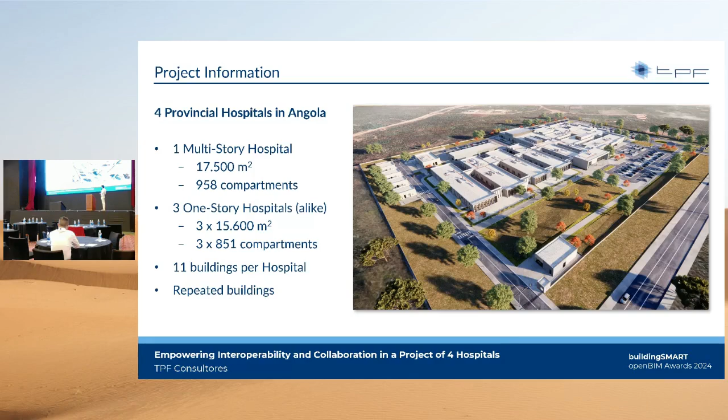In these 4 hospitals, each one of them has 1 main building and then 10 satellite buildings, and some of those satellite buildings are repeated between themselves. So just giving you some project metrics, around 17,400 deliverables were delivered, which are hosted in 376 different folders on the CDE. We have 81 native models.

In terms of IFCs that needed to be exported and shared, we have 66 different types of IFCs, and the IFCs that needed to be shared and delivered to the client, to the appointing party, were optimized to be reduced down to 35 different types of IFCs.

So our design development started from IFCs that were provided by the appointing party. These IFCs had not only the design concept, the geometry and so on, but all the design requirements that needed to be met for the specifications that the appointing party wanted. From these IFCs, all the task teams could start to work simultaneously without that initial interdependence between themselves, especially from architecture, and they worked collaboratively directly on the CDE.

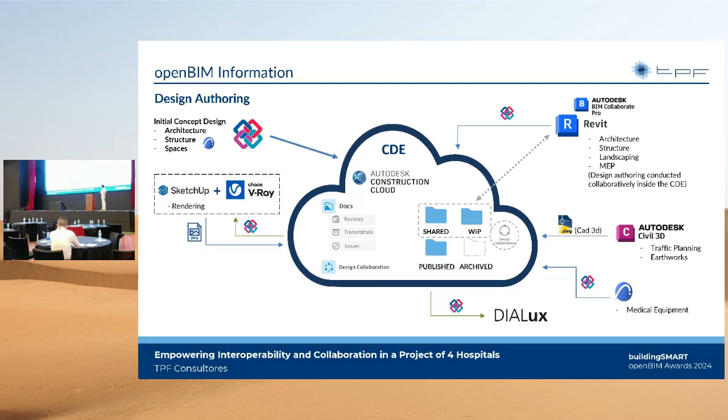And once the native models started to reach a certain level of maturity, IFCs were shared periodically to be used for many different purposes in this information exchange between the software. And just a quick note, we also produced documents on the Microsoft SharePoint Cloud and then shared them on the CDE. So this software ecosystem is focused on open standards usage. Of course, the ecosystem then branches to other aspects.

So continuing here, for the use of IFC from the side of the appointing party, Solibri was used, not only to check the models, the design progress, the technical solutions that were being implemented in the design, but especially and very importantly to conduct plausibility takeoffs for cost control. So having up-to-date IFCs was really important on their side too.

From the side of the appointed party, from our side, BIMcollab Zoom was used globally, which was widely embraced by all the team members, as it was very easy to use and accessible to everyone, and this really empowered the engagement of all the team members independently of their BIM proficiency. We also used this tool to conduct the clash detections and to perform the IFC quality control.

And in some specific cases, we used Navisworks to simulate options to accommodate all the MEP systems inside the available spaces. So this was for technical coordination rounds to see what the options were, so we could put all the MEP systems inside some spaces that were sometimes not so big.

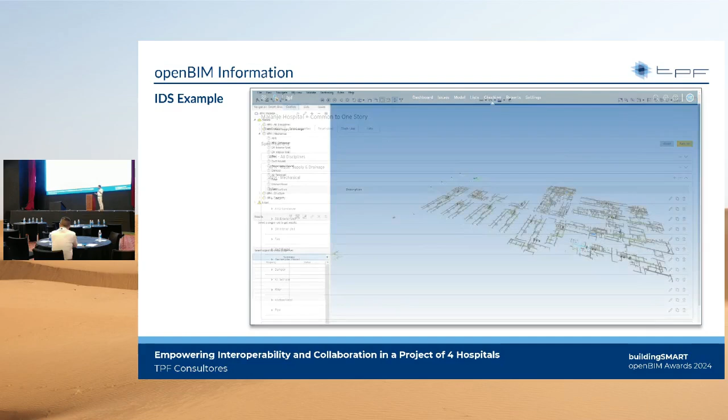We also used IDS to help us ensure the compliance of the information requirements on the IFCs as specified in the BEP. These IDS rules were set directly on the BIMcollab cloud, where we could push them very easily into BIMcollab Zoom and run the rules as needed, and it would automatically identify any non-compliance in terms of information, and then we could easily communicate via BCF.

Also a quick note: considering the amount of deliverables and the extensive number of different folders they needed to be hosted in, we used interactive Power BI dashboards to help us check the quality of the documents on the CDE in terms of their location, nomenclature, and revisions, and we prepared these dashboards based on data extracted from the CDE. We also prepared some Python scripts to automatically disseminate the documents throughout those 376 folders, and also to manage the revision numbers.

Now, talking a bit about the models and the modeling strategy, just for a quick recap. This project concerns 4 hospitals. We have 1 multi-story hospital and 3 one-story hospitals, which are very similar. In fact, the buildings that comprise each one of these 3 hospitals are the same, but they are located in different positions. So now we are going to focus on these 3 hospitals, although the 4th hospital would also follow the same principles, since some satellite buildings are also the same.

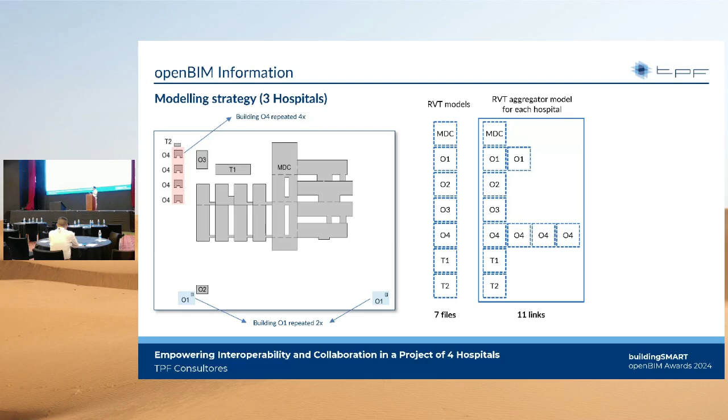Coming back to the 3 hospitals, as we can see on this image highlighted in red, we have building O4 that is repeated 4 times. And highlighted in blue, we have building O1 that is repeated twice. So each hospital has 11 buildings, but in fact it has 7 different types of buildings. So in order to optimize the design production, only the 7 buildings were modeled separately, and then these models and the prepared views were reused across the 3 hospitals in aggregated models. This really prevented a lot of work repetition and gave another efficiency on the design production.

But this meant that we needed to export 33 IFCs per discipline for the 3 hospitals. The appointing party was not very welcoming to receiving this amount of IFCs, and from our side, the appointed parties, we also saw that this was not very efficient. So Python scripts were prepared with the IfcOpenShell library that enabled us to only export the 7 IFCs, and from these we could generate 3 federated IFCs with 11 buildings each, or in other words, from these 7 buildings we could generate 33 buildings divided by these 3 federated IFCs.

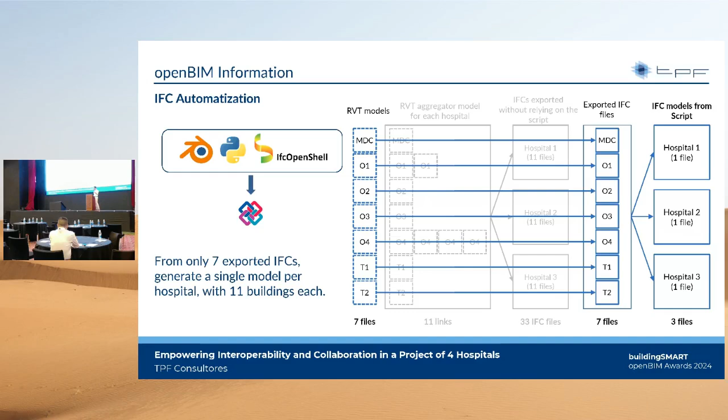Explaining quickly the workflow of this script. From these 7 exported IFCs, the script copies those IFCs and makes the necessary duplications for the buildings that are repeated, building O1 and building O4. Then it adds a prefix in the file name identifying the building, and that information is then used by the script to make the changes that we want through dictionaries. Then it conducts several changes, such as the IfcBuilding name, the location of the IfcBuilding, and so on.

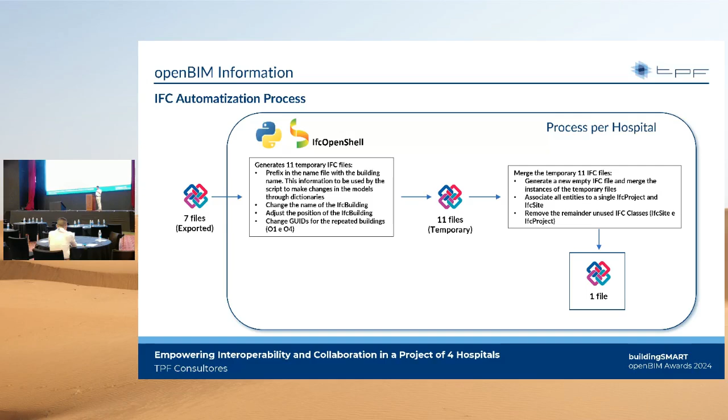Once we have that information organized in these temporary files, the script generates an empty IFC, merges and collects all the data into this IFC, and restructures it in order to have all the IfcBuildings associated to a single IfcSite, using as reference the first model of the list of temporary files. It always uses our reference model. It changes the name of the IfcSite and then removes the remaining IfcSites and IfcProjects. And then finally, it eliminates the temporary IFC files.

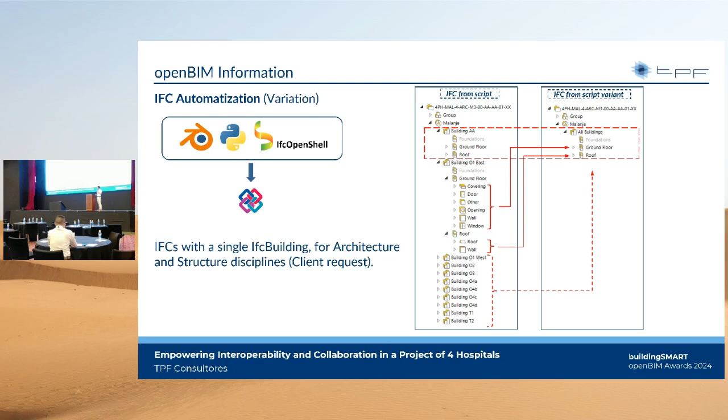Just to give an example, here we can see an IFC structure from an IFC generated by the script, with the several IfcBuildings allocated to an IfcSite. However, the appointing party then reported that the version of the authoring tool they were using could not import more than one IfcBuilding per file. So they requested the architecture and structure disciplines to submit IFCs with a single IfcBuilding. So we made a script variant that would relocate all the objects to the corresponding IfcBuildingStoreys of the first reference model.

Explaining a bit the principle of the script variant, for the sake of sharing: while before we were focusing on IfcRelAggregates to associate the IfcBuilding to the IfcSite, here we have the IfcRelContainedInSpatialStructure that makes the association of the objects to the IfcBuildingStorey. Considering that the RelatingStructure name is associated to the name of the IfcBuildingStorey, the script loops through the RelatingStructure names of all the IfcRelContainedInSpatialStructure and relocates them to the corresponding IfcBuildingStorey of the first reference model. At the end, it removes the remaining IfcBuildings and corresponding IfcBuildingStoreys.

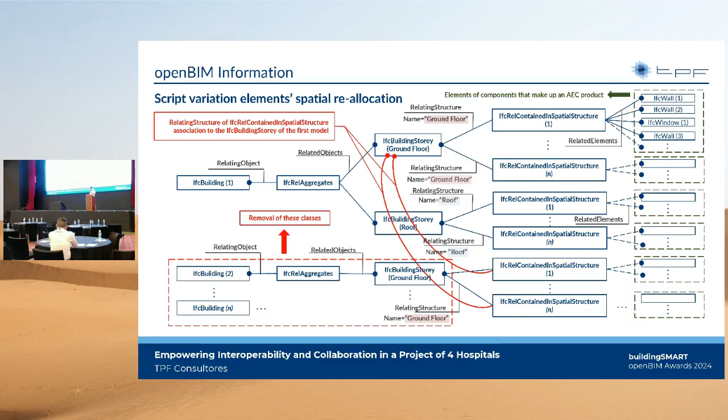So, to wrap up, besides the obvious interoperability advantages of using open standards, we also witnessed that they are really easy to use. They are accessible to everyone. And this really empowers the engagement of the team members regardless of one's BIM proficiency.

Specifically here, the IFC format made it possible for us to use Python scripts to improve the efficiency on the model production and delivery. And it has also shown to be a very flexible and reliable solution to deal with specific challenges that sometimes arise on the projects. So we believe that this project is just another testament of the incredible potential of openBIM in AEC projects.

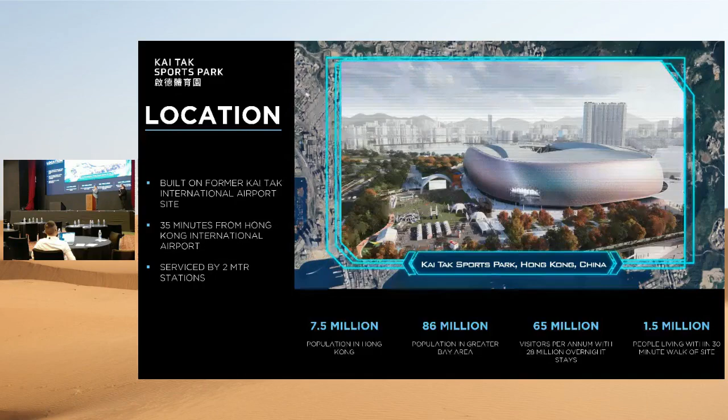We are deeply honored to be here today to share with you Kai-Tak Sports Park, an integrated sports, cultural, and entertainment facility in Hong Kong. The sports park covers an area of 28 hectares. It is part of the redevelopment of the former Hong Kong International Airport in Kai-Tak. The park is a design, build, and operate project, with Hip Hing Engineering being appointed to take care of the design and construction.

The park features a 50,000 capacity main stadium, an arena for sports and entertainment events, as well as a public sports ground, together with extensive public open space for the public's enjoyment. This is a huge complex. Without the adoption of the openBIM approach, it is almost impossible to complete this project within just 5 years.

A project at this scale and complexity requires lots of expertise. The team managed to gather 500 BIMmers from all around the world, working as one team. At the beginning stage of the project, Hip Hing managed to train and form a BIM management team of 50, which helped to complete the project as we moved on. Now I'm going to turn the stage to Nathan, who will tell us more details.

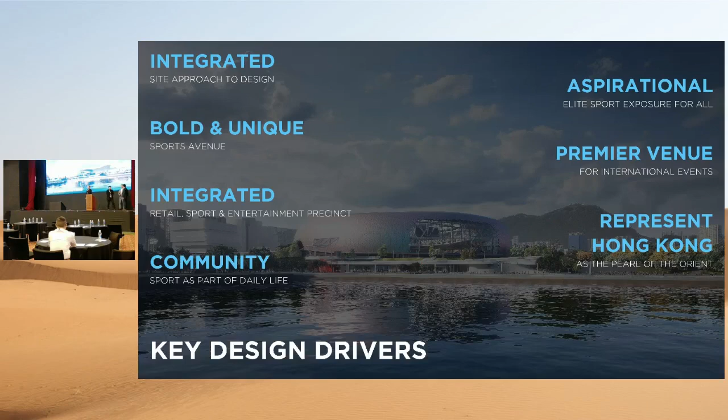Thanks, Simon. Hi, I'm Nathan, a principal at Populous, the architects on this project. Our main design vision here was to really integrate the project into the very fabric of Hong Kong. This needed to be a community hub and something that would benefit the public, but we also wanted to inspire current and young emerging athletes living in Hong Kong.

The magnitude of this project was quite enormous. It's 800 uniquely authored BIMs. We had over 5,500 IFCs exchanged and over 85,000 BIM Track issues resolved using the BCF format. This was 140 global companies working together.

And crucially, the Hong Kong government on day one said to us, one of our key goals is to maximize the use of BIM on this project. That gave us the mandate to really set out a very clear virtual design and construction strategy for everybody involved, which was crucial to getting this done.

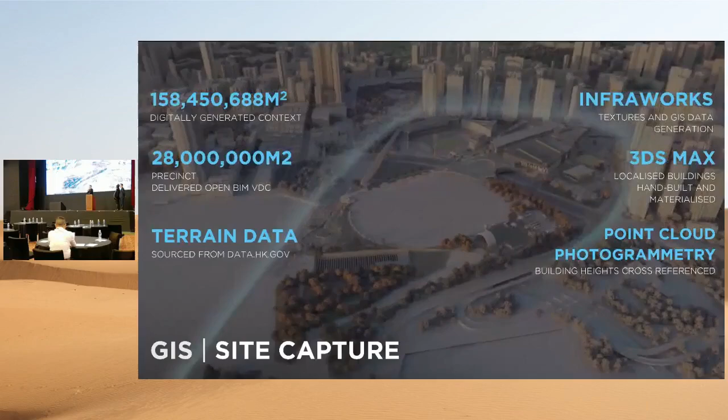We generated over 158 million square meters of the surrounding Hong Kong context. GIS was used across the various sources of models to align all the models and to also check and validate their location proximity, cross-referencing that against the project BIMs and also all of the project surveys that we had. This process involved using digital maps, terrain data, open source data, and also privately sourced context models, which we then compiled together using all of the embedded GIS data in those files.

After that, we used photogrammetry to make sure that we had a higher level of detail for the site and that we had all of the latest information that we needed. These videos are created in Unreal Engine 5. We've directly translated the BIMs across to the engine using Datasmith and Data Prep.

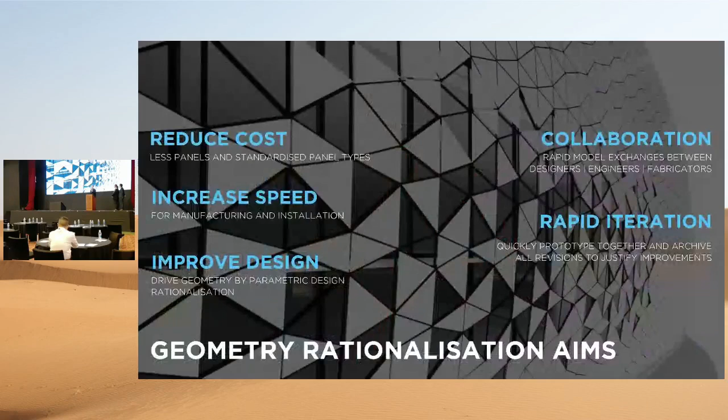Okay, so the facade rationalization of the main stadium. This is one of the most complex parts of this project. What we needed to do was actually align our design vision with the practicalities and the feasibility of actually getting something of this size manufactured and installed on time and budget.

We knew we needed to iterate very rapidly, and the only way we could do this was with very early subcontractor engagement with the manufacturers, so that we could exchange BIM models in a bi-directional flow while we were working on the design models. We could share those models direct to our subcontractor, who could then analyze what was happening and send it back to us to make sure that we could actually make this work.

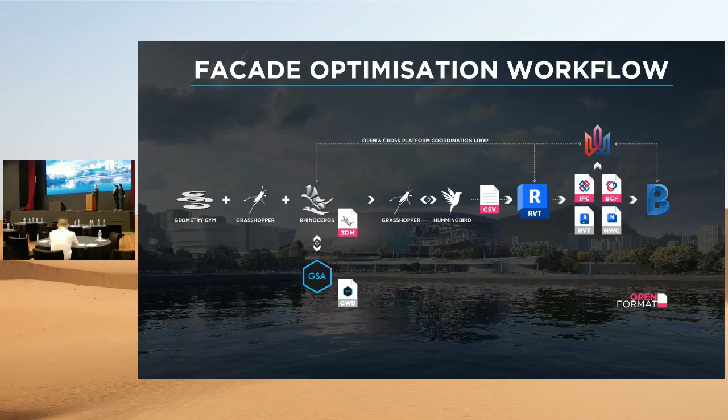This virtual collaboration, had it not happened, would not have allowed this to be possible. One of our main design drivers as well was to minimize the amount of material wastage when cutting the panels. This is a brief overview of our facade rationalization workflow. A lot of coding, a lot of visual scripting programs, and then again, the bi-directional sharing of models between ourselves, manufacturing and engineering.

So the digital process here is really about rationalizing a few key points to the project. The first one, rationalizing the panel vertical grid spacings between each panel. We need to make sure that we are mitigating the amount of bespoke panels that are being used. We need to maintain the fixing details of each one. And we want to make sure that we're flexing the panel gaps enough to get our design outcome without it impeding on the installation of the panels.

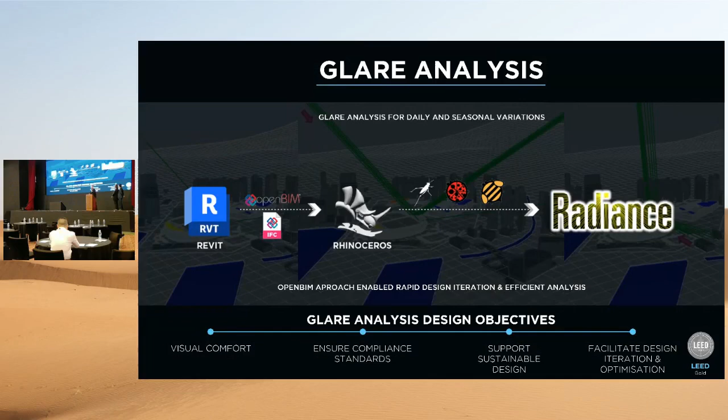Arup and Populous also worked very hard and rigorously on our glare analysis to make sure that the panels were not having a negative imposition on the nearby residents of Hong Kong. So ultimately, through these virtual processes, we've reduced our panel count from 47,000 to under 27,000 panels. We've managed to reduce our overheads in construction, particularly fabrication and installation, by 40%.

We've reduced our steel tonnage. We've reduced our glazing weights. And incredibly importantly, we've actually reduced the CO2 emissions of our facade by over 25% on the main stadium and over 30% on our other venues.

I'd also like to take a quick look at some of the other work we did focusing on our spectator analysis and experience when designing a venue. So we're specialists of stadium seating bowl design. Really, the main drivers for this are the fan experience. Our main goals here are to make sure that every fan can see the field of play well. We want to make sure that they don't have any obstructed views, and we want to make sure that their proximity to exit points and also to amenities is optimal.

So, two primary goals in this process. To do this quickly and to make sure governments and clients are happy with the results, we needed to create our own series of workflows and tools that could work alongside the main authoring platforms. And we also needed to make sure we had a way to easily validate every step that we took and every design change that we made so that our contractors could understand and know that we were making the right call with every decision that the team made.

A quick look at our design analysis workflow. The main point here is really getting the information out of the models and the data out into Power BI or Kibana or Tableau in order for our stakeholders to be able to visually understand what was going on so that they were happy with it. This is a quick look at one of the new platforms we built, a custom-built software to enable us to quickly iterate on what we were doing.

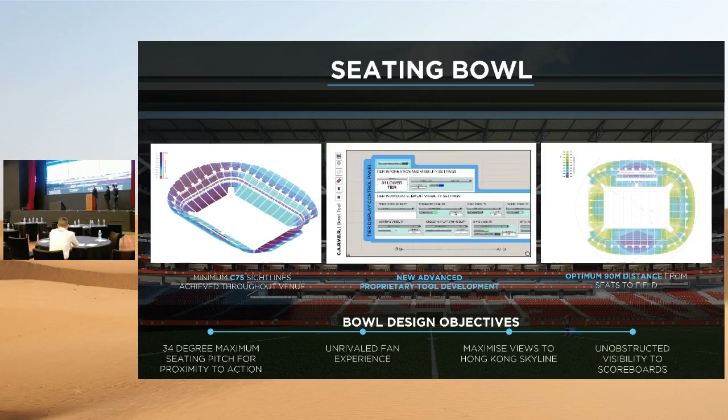openBIM is critical for this, the concept to allow us to do better stadiums and actually create new benchmarks. We need to create new software and tools to be able to work for our specialization. It's critical when doing this that we can allow the geometric and non-geometric data to flow throughout the entire ecosystem and not be bound by a particular software platform. So that's a small sample of one of the platforms we built for this project.

So some of the key objectives that we achieved from this. Well, firstly, how do we measure this? There's quite a lot to go into here and it's complex, but at a very basic level, we use a range of qualifiers to actually validate and judge the success of a seating bowl. What we're looking at here is C values, and C values tell you how well a fan can actually experience an event. We generated a minimum C value of 75 for our general arrangement and 125 for our VIP suites. That's actually really a new benchmark in rectangular seating bowl design throughout the world.

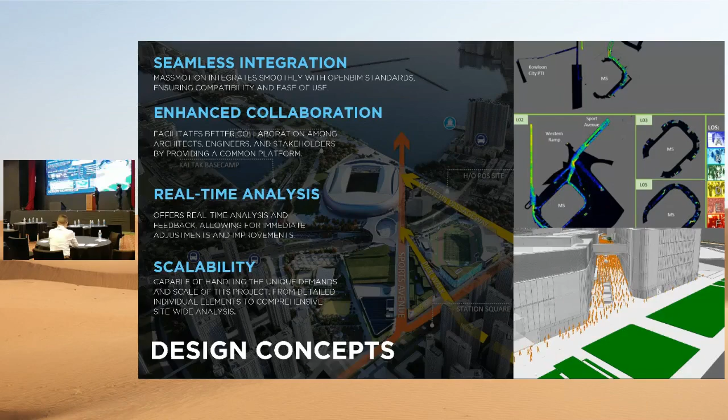MassMotion is an Oasys software which is compatible with IFC, so we can seamlessly integrate it in our BIM workflow. Our workflow is that we first extract the useful information in IFC format from our BIM model, then we import it directly to the MassMotion software. The key elements such as the staircases, the escalators, or the barriers will be imported seamlessly into this model so that we can quickly set up the MassMotion analysis.

With the detailed MassMotion analysis, we can simulate various dispersal scenarios for 50,000 attendees, ensuring they can merge into the nearby public transport within 60 minutes after the end of each event.

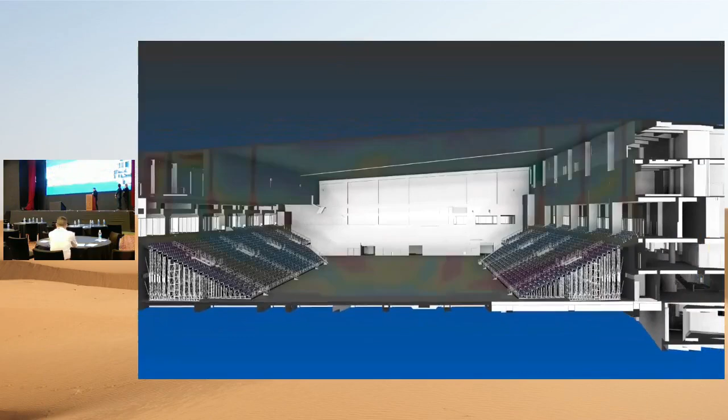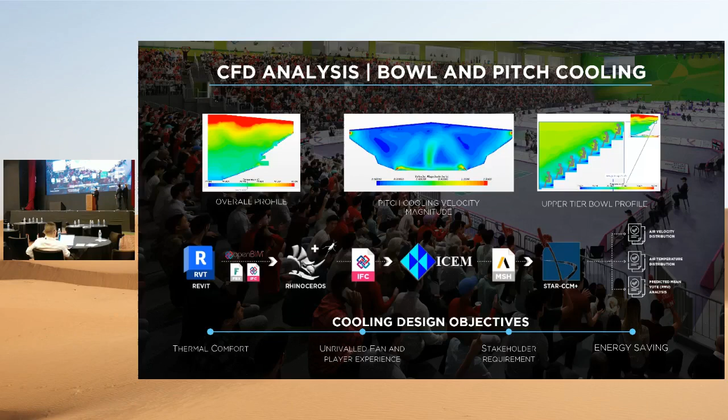Next, I would like to mention the CFD analysis we carried out. CFD analysis is very important for sports facility design, which helps to verify the airflow and also the thermal comfort of the audience. Our design workflow involves the extraction of useful information in IFC format, and we tidy up these IFC files by our script in Rhino and Grasshopper. Then we export the files to make the finite element model for the CFD analysis.

With the use of the openBIM workflow, we can quickly set up over 20 CFD analysis models to test the 20 different operation modes of the stadium and also the main game arena. Particularly for the concert mode in the main stadium, over 10,000 audience will be in the pitch area. The CFD analysis helps us to verify our design assumption for the pitch cooling and also ensure the thermal comfort can be achieved.

Let's move on to the steel roof design for the Kai Tak Stadium. The Kai Tak Stadium features a very unique roof design that combines fixed and retractable elements. So early in the design phase, Populous and Arup already made use of openBIM to exchange design information, which enabled quick adjustment of the design. The whole design is in a parametric environment under Rhino and Grasshopper. And then we make use of the structural software to carry out the steelwork design and the steelwork optimization.

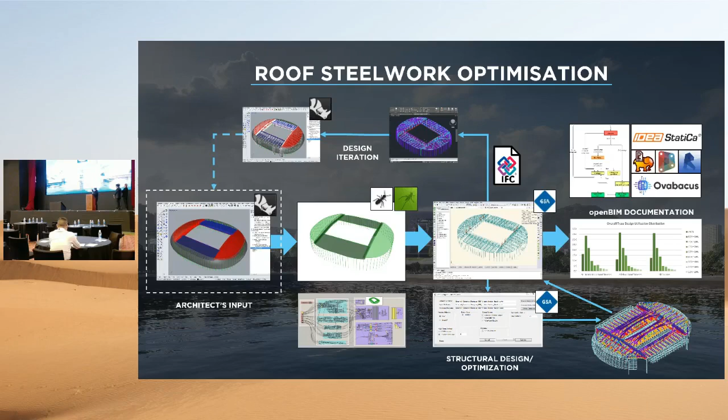The structural information and the necessary adjustments will be documented in the IFC and communicated back to Populous for the necessary adjustment of the architectural design. So these workflows will go on until a certain level of maturity has been reached. So this is the overview of our overall roof design workflow.

Once the design is mature, we set up a federated BIM model for us to directly communicate with the steelwork fabricators. We actually developed a Grasshopper script for us to quickly verify the accuracy of the fabricator's model. The as-constructed information can also be imported to our BIM model by means of point cloud data.

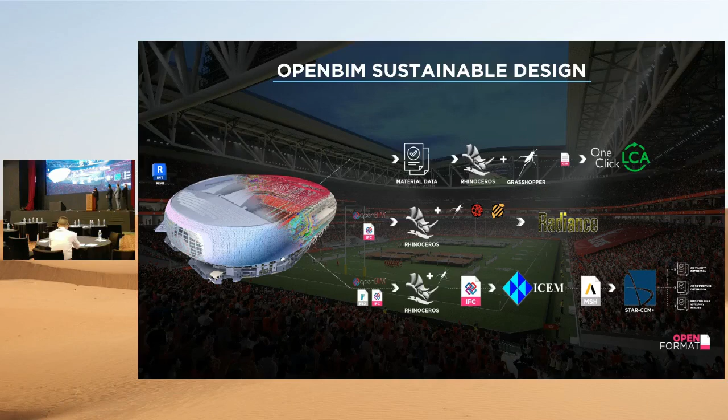Lastly, I would also like to mention that sustainability design has been deeply embedded in this mega project. We have secured 3 different green certifications: BEAM Plus Platinum, LEED Gold, and also the China 3-star Green Building certification. We also make use of the openBIM workflow to help us achieve the sustainable design in terms of carbon life cycle analysis, the glare analysis, and also the CFD analysis. Lastly, we also fulfill these kinds of sustainability design goals.

Now I'll pass the time to Billy. Thank you, Horis.

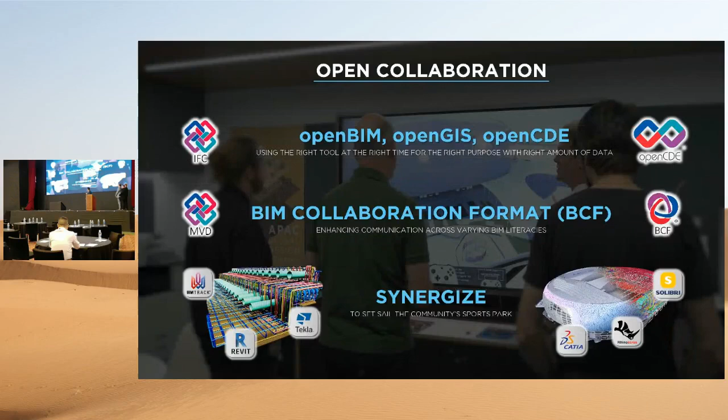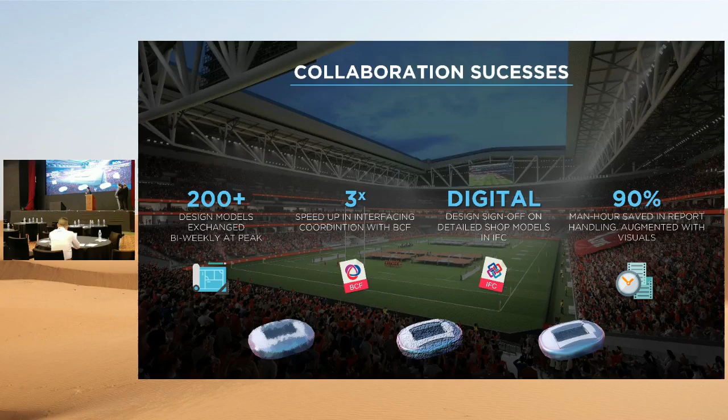As a result, we have more than 200 models being collaborated bi-weekly, sped up by 3 times using BCF format, and digitally signed off using IFC for our sharing, archive, etc. It also helps us speed up 90% for reporting and communication. And also for Solibri, we have more than 30 rules implemented, speeding up our engineers 20 times for their engineering works. It helped them save a lot of time for their engineering tasks instead of checking.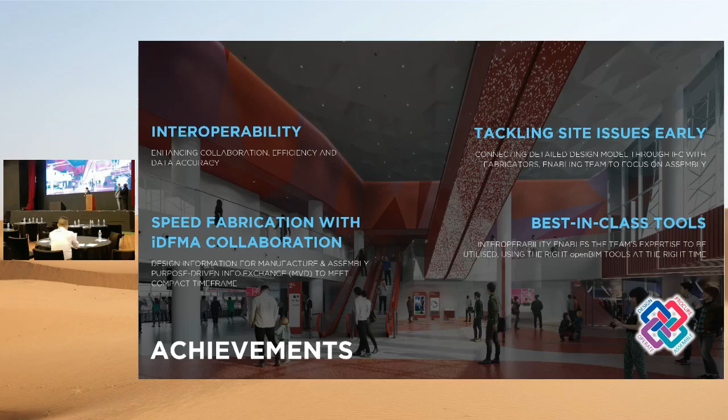And this is our achievement. We have a good interoperability for collaboration, speed up the fabrication process, tackling site issues earlier before the design is frozen, and also allow us to use best-in-class openBIM tools to do the right thing with the right tools at the right time.

And for our lesson learned, I think this is our vision for the next mega project. Client side should be contractually bound with IDS and bSDD standards. By utilizing IFC and BCF workflow, we can collaborate all the professional software together, and hopefully we can do a better, faster, and smarter project next time. Thank you.

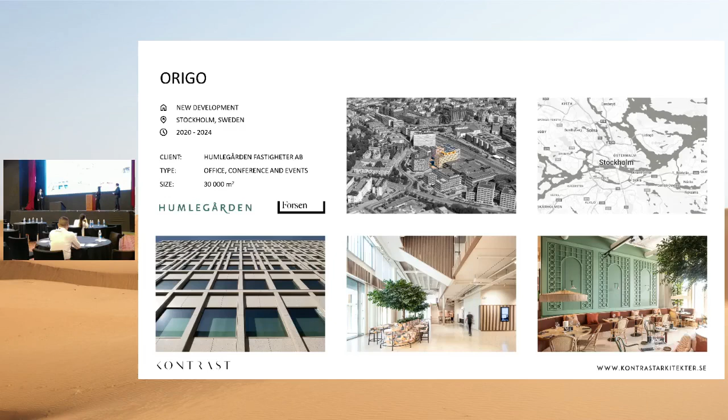Our goal is to work with projects with high design ambitions. We like challenges, and that's why we prefer to work with large-scale complex projects where strategic thinking is required to add value and where we find the opportunity to evolve as a company. The project we are going to look at today is an office building in Stockholm, Sweden. The project consists of 30,000 square meters of office, conference, and event spaces, and was finished in 2024. We would like to present the project with a short video clip.

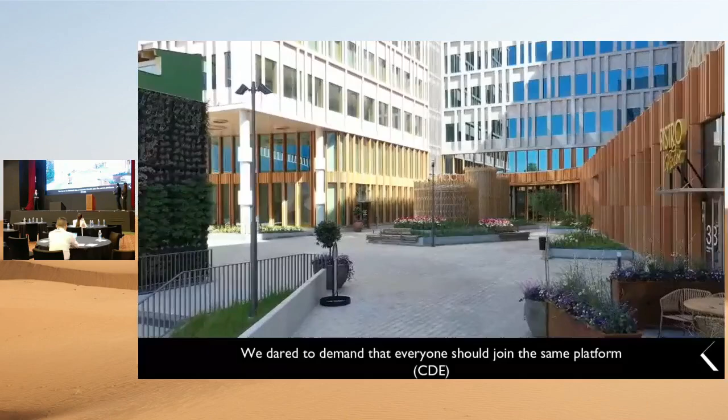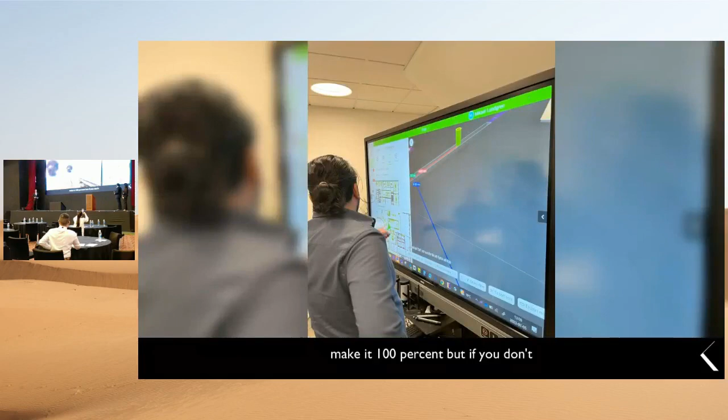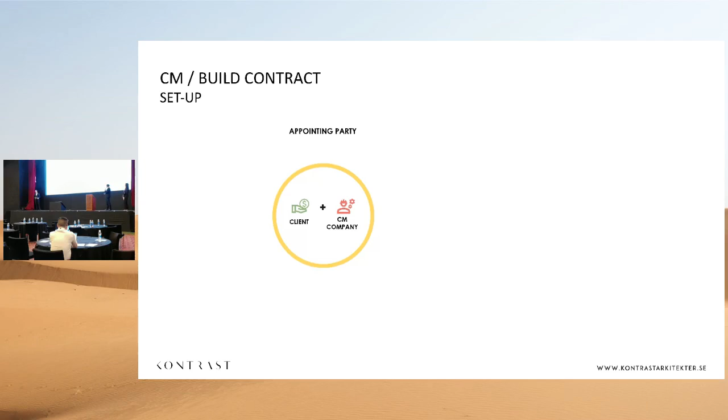So the client had high ambitions, but there was also a need for increased structure and control of the project. The contract form was a so-called CM build contract, which implies that the client is both the appointing party and the appointed party according to ISO 19650. A construction management company was hired to help the client to develop the request documentation. The same entity was then also the receiver of the request documentation as the appointed party.

The project is divided into a large number of partial contracts that are procured separately and managed by the CM company. This model is often used by large commercial projects since it gives the opportunity to change the project at a low cost. Commercial projects have a strong need to adapt to market circumstances. In our case, since the start of production, we had an unforeseen pandemic. We had the Russo-Ukraine war with delivery shortages. We had rising inflation, surprisingly, and radical change in work behavior, which led to insecurity in the office market.

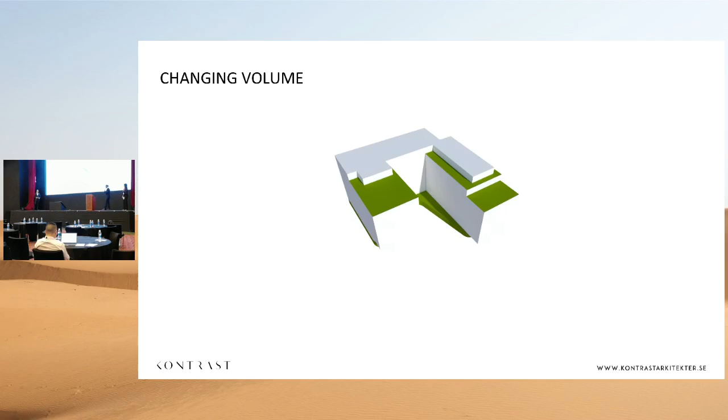So all these factors led to the fact that the building changed shape from this into this. So it goes without saying that when 150 separate contracts are managed at the same time that the building is changing shape, it requires good tools to maintain control. The project in total changed the scope about 19% during construction, but we managed to maintain the adjusted budget increase to around 0.5%.

So when we came into the project, there was a 3D model on the side with restricted access and used mainly by the design team. There was also a large number of different platforms used for different parts of the project, such as a cloud storage for drawings, client's own document storage, CM company's document storage, separate platform for model task management, tons of emails, separate platform for viewing 3D models, an external software for 2D reviewing, and meeting protocols in various formats.

We wanted to change the 3D model and place it in the center to use as a communication tool. Then we wanted to include everything in one CDE so that we could obtain overview and better control during the project. The centralized CDE platform is our definition of the digital cocoon. So in the start of a project, you never know how the project will evolve. Therefore, it's very important to design the CDE so that new processes can be added when the need arises.

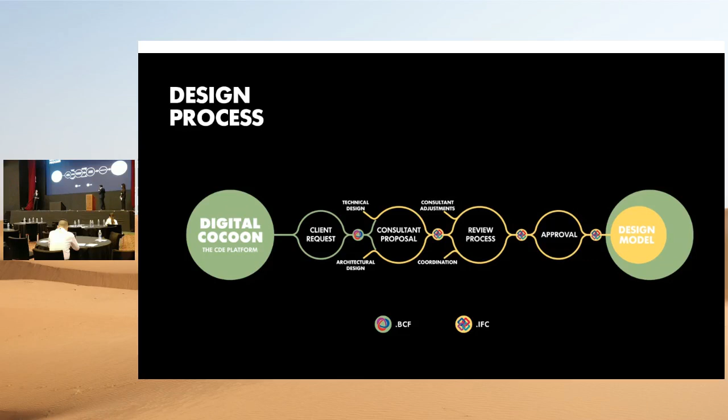Since all communication is made in the digital cocoon, all the information comes from there, and since all data is stored in the digital cocoon, the results are sent back. This can be visualized like this. So, information comes from the cocoon, is processed, and the results are sent back to the cocoon. Various other processes can be added in the same way, where information is collected, processed, and sent back.

So as time goes by, the amount of information is increased and new processes can be added, such as the process for sustainability, simulation and analysis, model validation, budgeting, economic prognosis, and procurement. When procurement is done, contractors will be added to the CDE, and there will be a need for a separate construction model. This model contains only the parts of the building that are approved with construction documentation. So from the beginning, the construction model contains only the foundation and gradually is completed with other contracts until it reaches the same level as the design model.

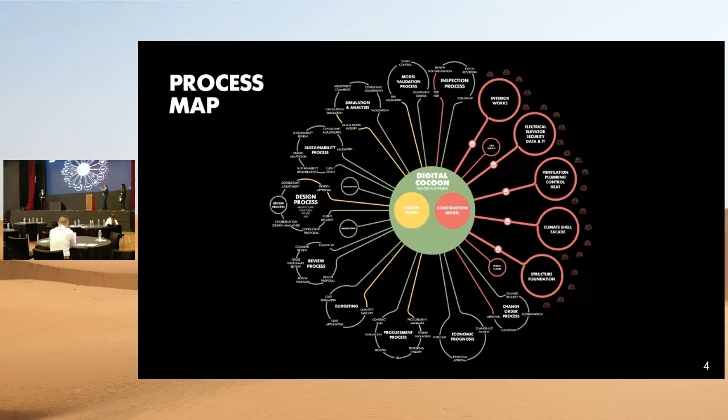When construction work starts, there will be need for new processes, such as the process for inspection and change order. When we look at the process map, we can see that the left side is focused on design processes, whereas the right side is focused on construction. But they are all connected to the same core and can influence each other as parts of one whole.

This type of communication, this kind of digital communication and data storage, is possible thanks to the openBIM standards. So when we look at the process map with BIM glasses, we can see how different hardware and software can communicate with each other seamlessly.

When the project is finished, it is the construction model that is more complete, and the design model is not necessary anymore and can be archived. The construction model contains all the correct information of the building, so components can be changed into assets, and the CDE can be used as an asset management tool ready to be handed over to facility management.

Thank you, Hanif. It might be interesting for all to see how these theories turn into daily practices. In the next video, we are going to watch some supporting evidence.

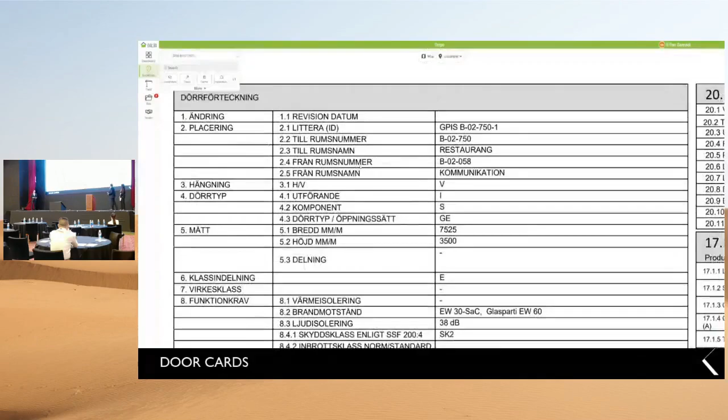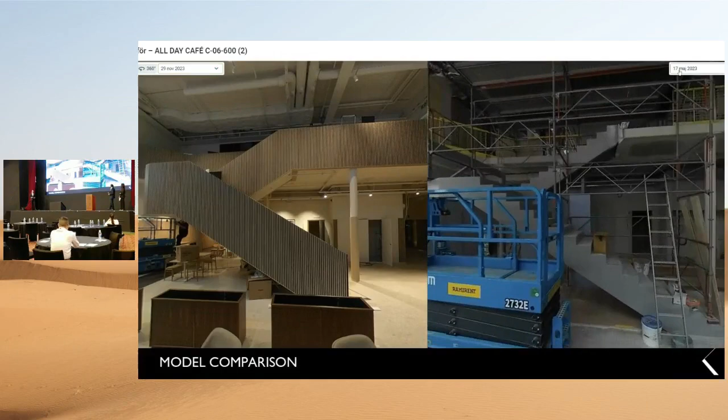We have about 100 fixed stations inside the building, taking monthly 360-degree pictures that save significant time and cost during online design meetings. All meetings were scheduled inside the CDE, with minutes linked to 3D with BCF, making navigation to the relevant areas easy during meetings. All consultant IFC models are overwritten with each export, enabling model comparison and change control. BCF communication significantly reduced time for review, clash control, and model validation, leading to more accurate and optimized production.

All communication with tenants was handled inside the CDE, allowing tenants to participate in the design process and view their spaces in 3D. All inspections and safety rounds were conducted in the CDE platform, with inspection points linked to the model geometry and sent via BCF to the responsible person. All rooms and zones are exported to the CDE, containing key details like specification, geometry, and sensitive information useful for building maintenance. The entire procurement process was managed in the CDE platform with the help of given quantities from models. We could ensure accurate cost estimates and budget planning.

Change orders, time planning, and budgets were managed in the CDE, with 3D changes linked to models for clear understanding by all parties. Production people on site have access to the exact same IFC models as clients behind the desk. All digital information is reviewed by all parties and ready for construction. Consultants had to deliver according to IDM, MVD, and bSDD standards. All object parameters will be handed over.

Well, that was cool BIM features, right? Let's take a look at some numbers from our design process. We had more than 600 direct users inside the CDE platform. We had 27 IFC files, which were constantly updated, with almost 255,000 IFC elements. However, we had only around 800 clashes detected and solved, which is not much for that many elements. Well, the reason is nothing but collaboration of all parties in one CDE platform.

During the course of the project, over 6,000 tasks were issued, and we also had more than 3,400 comments. Some of these comments were created during our design review processes. We had 68 packages for reviewing different stages of design. So in total, we had close to 10,000 communication threads inside our CDE platform. These are legal references which can be easily filtered and sorted out for future use.

To summarize, the centralized CDE platform gives us the advantage of keeping control in stormy waters. The time for communication and finding information is reduced substantially, so you can just pick what you need. There's no need to send a request for information. It also gives increased traceability, which gives enhanced accountability, and this results in users taking more responsibility and raising the level of quality control for their deliveries. And this creates a sort of digital lean production.

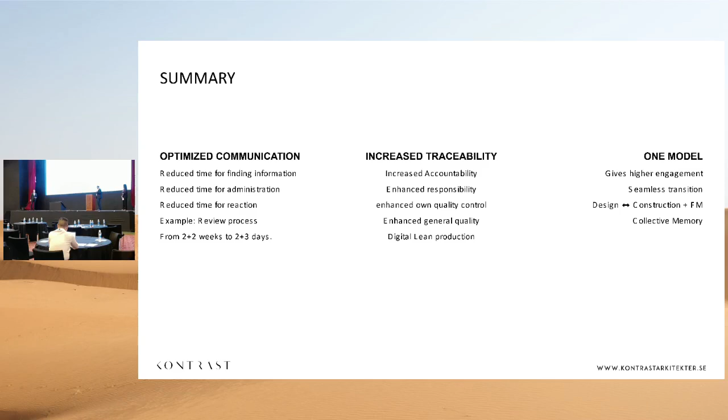So everybody, from the workers on site to the project manager behind the desk, uses the same model. This leads to equality and higher engagement, and with all information stored in the same place, it results in a collective memory of the project. So now we all strive to work hard to advance in the field of digitalized construction with CDE platforms, openBIM standards and AR features, and then we come to the work site and find this on the wall.

So it's a printout of the CDE used by the workers. Change is good, but we also need to know that there are people who need more time, and we have to help them on that way. Thank you very much for your attention, and sorry for the extension of the time.

Thank you. So if I could ask Hugo and the team from Hing to make their way back to the stage. We'll just take the time for a question to each of the submissions before we move on. Same question to each of them. Yeah. See what they come up with. Yeah. I'm in favour of it in the interest of time as well. Oh yes. Okay, I'm going to hand over to Nick, who has a question.

I'd like to ask each of the finalists what lessons or changes would they take forward to their next project, given their experiences?

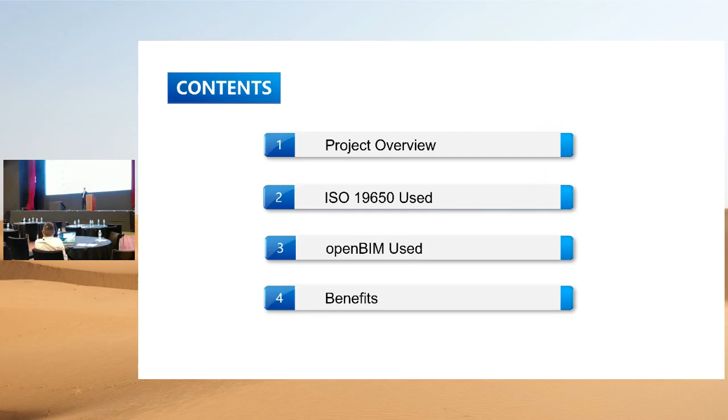Good afternoon, everyone. I'm Huaisong from China Railway Eryuan Engineering Group Company. And our submission title is Application of openBIM in the design and delivery of Guiyang to Nanning high-speed railway. And now I will introduce our project from the following 4 parts. They are project overview, ISO 19650 used, openBIM used, and benefits. The first part is project overview.

Guiyang to Nanning high-speed railway is one of the key parts of China's 8 vertical and 8 horizontal high-speed railway network. The total length is 482 kilometers, and the design speed is 350 kilometers per hour. Total investment is $10.4 billion. And this project started in 2016 and has been put into operation since 2023. And this project has high requirements on quality, safety, environmental protection, and sustainability.

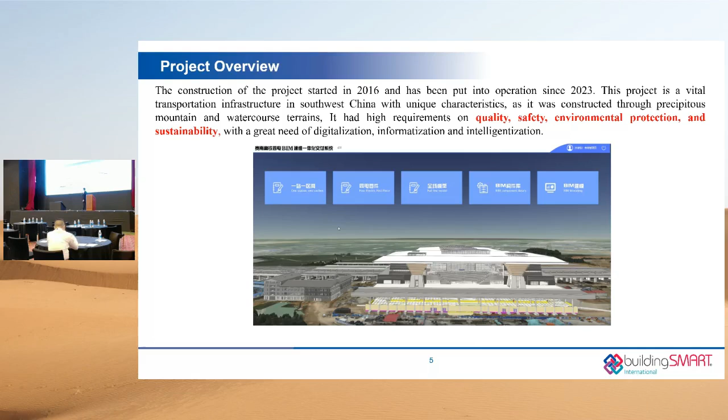This is regarding the party and the stakeholders. The owner is China Railway Nanning Group, and the design company is China Railway Eryuan Engineering Group Company, and the construction company is China Railway Electrification Engineering Group, and the platform provider is China Academy of Railway.

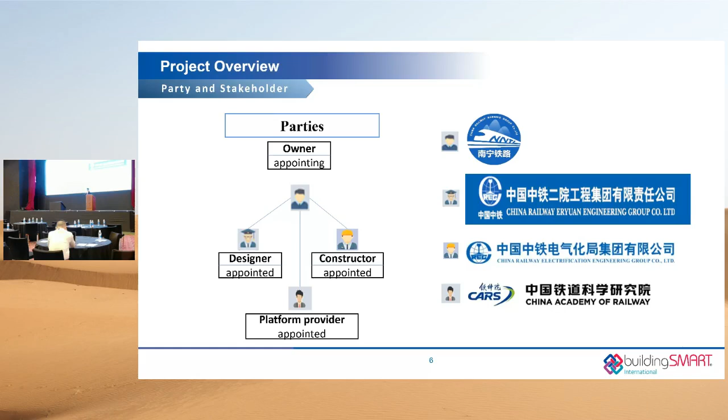And we have summarized the 4 highlights in this use case. They are process, platform, standard, and software. Process means ISO 19650 standard process and openBIM based engineering and production process. Platform including BIM and GIS and the digital delivery platform. The third is standard. We have produced the object types, Psets, bSDD, use cases, IDM, and the conceptual model for IFC Rail. And we also completed verification and validation of IFC 4.3.

The fourth is software. We have developed different kinds of modeling and simulation software in this project, such as parametric rapid modeling, signal visibility check, and video coverage simulation, and so on. The second part is ISO 19650 used.

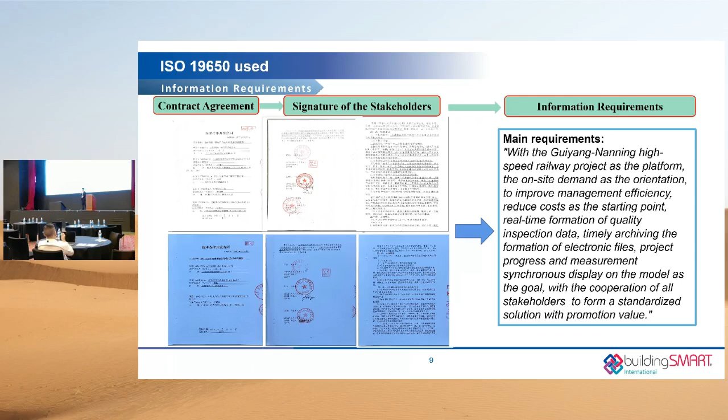In order to achieve a better information management process, at the very beginning of this project, we adopted the ISO 19650 standard. And firstly, we extracted the information requirements from the contract. The left shows the signature of the stakeholders, and the right shows the main requirements from the owners. According to the requirements of the owners, our main goal of this project is to realize an in-depth application of openBIM and the digital delivery, and then improve the informatization, digitalization, and intelligentization of this railway.

So in order to carry out these requirements, we adopted ISO 19650 information management process and produced the BEP, fully adopted openBIM standards such as IFC, IDM, BCF, and MVD. We also established the project CDE to realize the cooperation, data transferring, and the sharing.

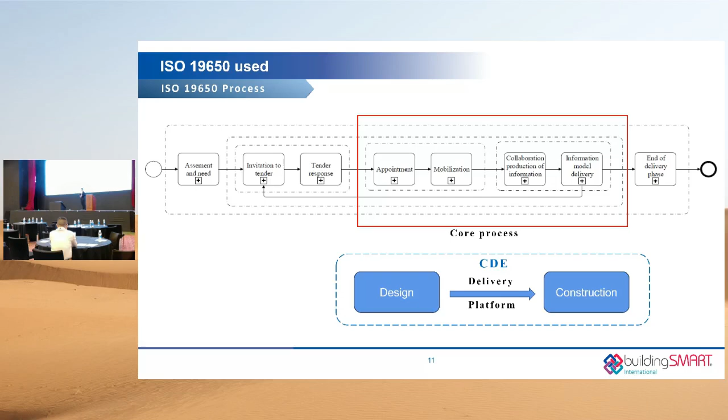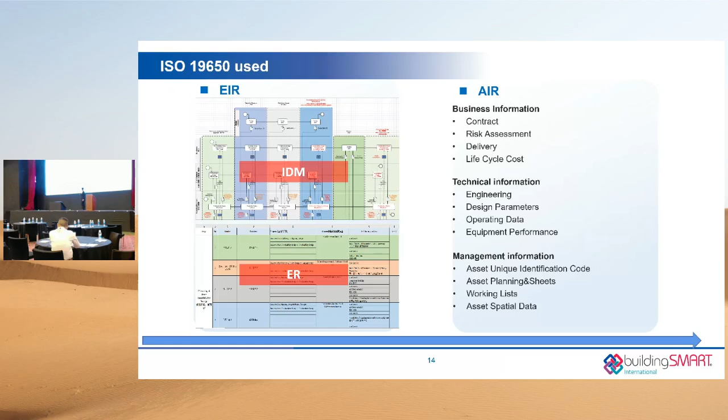We also developed a BIM execution plan as well as the associated milestones in this project. We have regular meetings, trainings, as well as on-site surveys in the process of our project. The next part is CDE. We built a CDE platform that integrated different kinds of software, and this platform meets the collaboration needs and ensures that BIM information data can be losslessly transmitted and shared in the design and the delivery process.

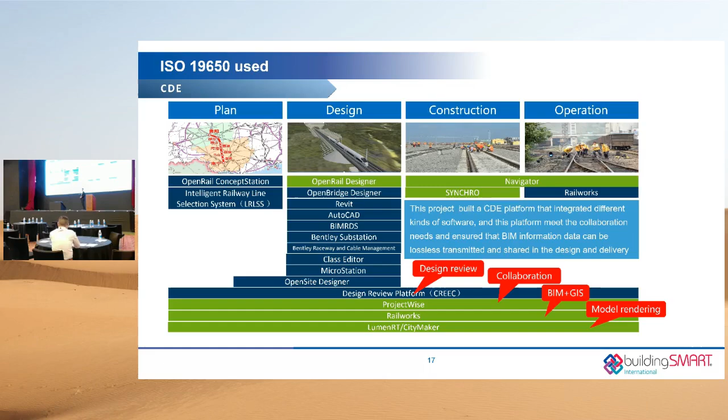The third part is openBIM used. This slide shows the software ecosystem map based on BIM, openBIM, and ISO 19650 standards. We use different software in the project. For example, we use ProjectWise for collaboration design management platform, AutoCAD and ORD for alignment design, ORD and MicroStation for the design of bridge, tunnel, subgrade, signaling, and so on. And Revit is for building design.

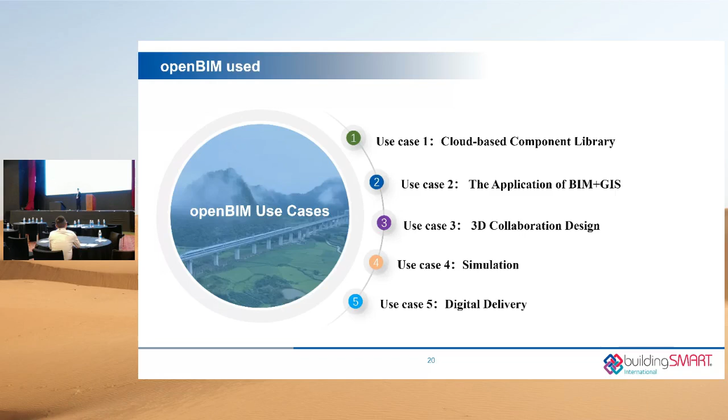We have 5 key use cases in our project. Now I will introduce these use cases. The first use case is cloud-based component library, and we have built a cloud-based component library covering railway domains.

And the second use case is BIM and GIS. We created a BIM and GIS platform, and it integrated display of the entire railway line and helps with multi-domain solution reviews based on BIM and GIS.

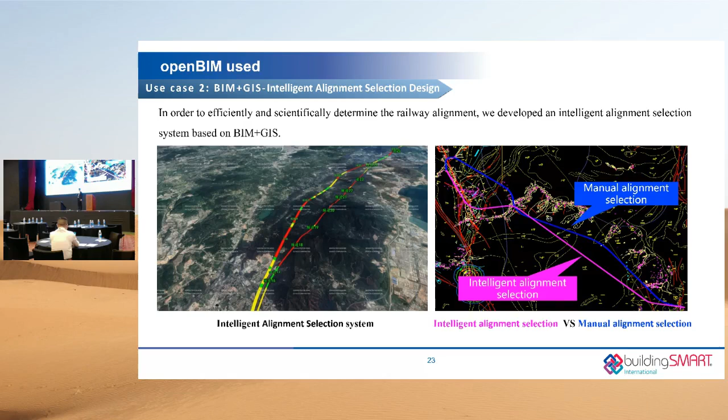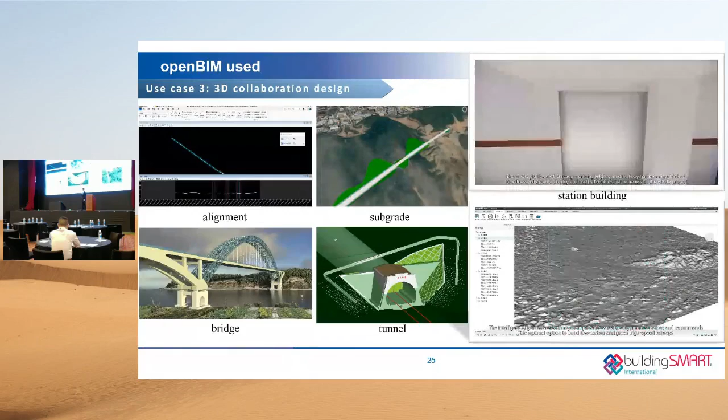As we know, there are some hidden areas in railway engineering, especially the underground cables. So we use 3D models or VR to help the workers locate the hidden facilities. And we also use visualization and VR to help with the training and safety management.

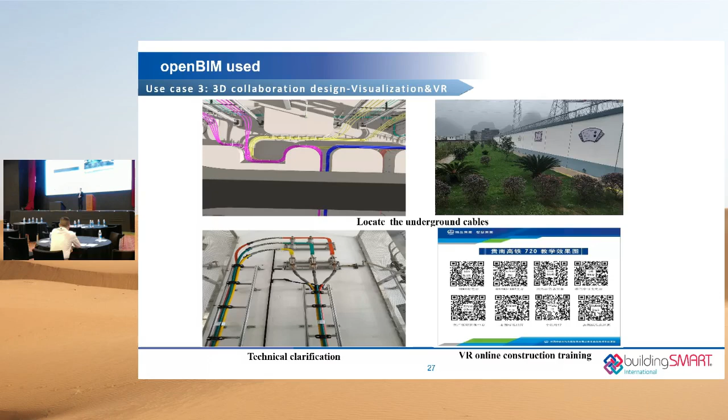The last use case is digital delivery, which is a very important use case in our project. In order to implement the digital delivery, the project built a platform based on RealWorks, which is a self-developed platform. And the delivery file formats include IFC, XML, PDF, etc.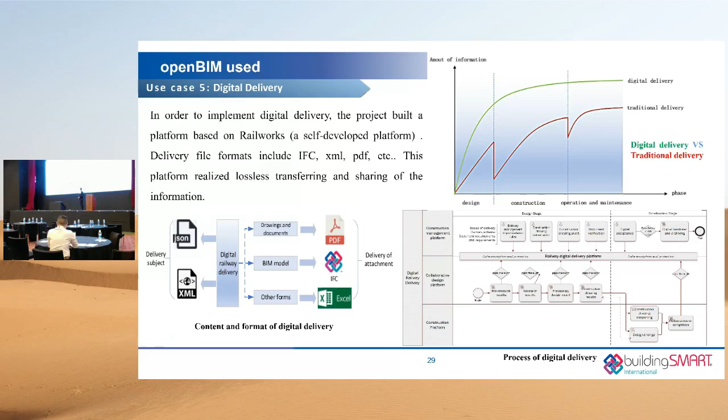And we adopted international standards such as ISO 19650, IFC 4.3, as well as CRBIM standards. We have produced the PSETs, use cases, bSDD, IDM, and UML for the IFC Rail extension. And we also completed the verification and validation of IFC Rail. And the outcomes have been included in the officially released ISO 16739 standard.

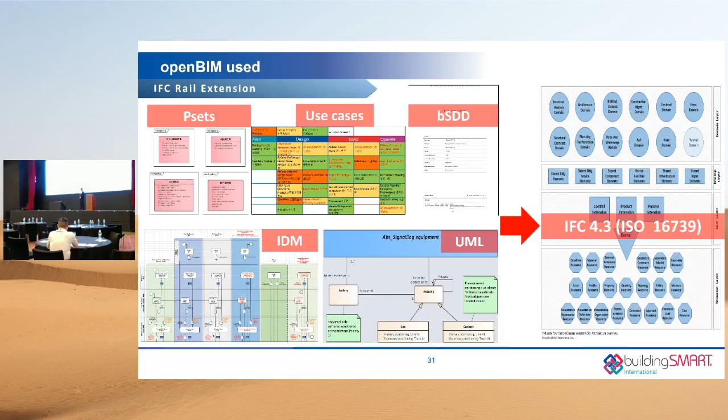The last part is openBIM benefits. It can be seen from these statistics. We have 19 software, about 100 BCF topics, 36 extensions, 457 entities, nearly 700 pieces, about 380,000 objects in this project.

Regarding the economic benefits, first we reduced the number of alterations by 50, and the construction period was shortened by 35 days. Total cost reduced by $2.75 million. And we also effectively avoided about 100 cases of errors or mistakes. And we improved the efficiency of modeling by more than 30%.

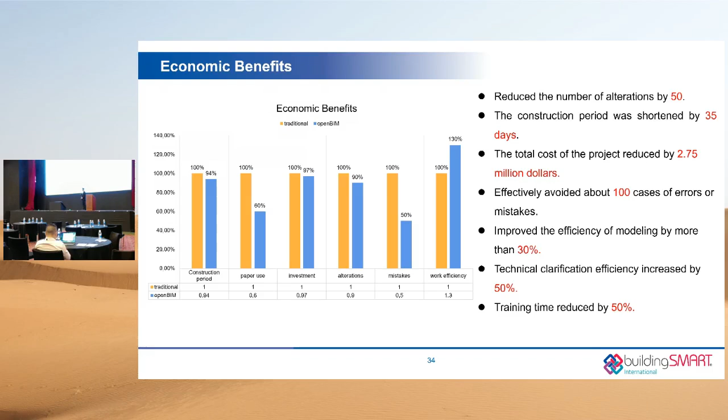So to sum up, thanks to openBIM solutions, not only the project objectives and budgets reached the expectations on schedule, but also the digital delivery was implemented. These achievements not only greatly improved the quality of the project, but also reduced costs and risks effectively.

Copenhagen Metro was established in 2007. Currently, we have 4 lines in operation. The company responsibilities are developing and building the metro system in Copenhagen, Denmark, and enhancing the customer experience to support the city mobility and environmental goals through innovative solutions.

As a client, we have a high ambition of implementing openBIM. For that reason, we have set 3 main goals. The first one is to overcome boundaries of interoperability and to never be limited to specific software. The second one is to have standardized and structured data to increase data reliability, automation routines, and to help us to take data-driven decisions.

And the third one is to have a CDE aligned with the ISO 19650 that can support open collaboration and ensure that all the information related with the project has been shared and coordinated across all the stakeholders.

In Metro, we have set an objective of implementing openBIM from initial phases of projects to support our business needs. To achieve that, we have started the openBIM standardization project, whose roadmap is presented on the screen. Going from left to right, we have started researching, testing, and mapping our OIS, that is our internal classification system, with the IFC 4.3 schema, as well as standardizing our parameters and providing them through the attribute matrix.

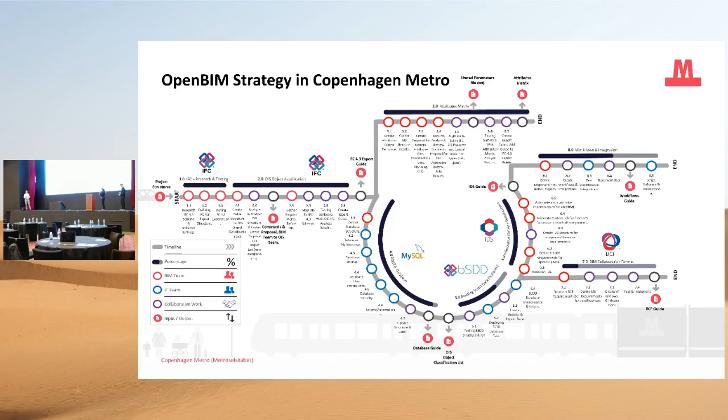The new M5 Metro line will be located in Copenhagen, Denmark. The project consists of 10 stations, approximately 12 to 14 kilometers of double tunnel, 5 kilometers of elevated track, and an artificially created island. The opening is expected in 2035, and the phases of the project consist of conceptual design, reference design, then we go for tender, then we have preliminary design, detailed design, and construction. Currently, we have finalized the first phase that corresponds to conceptual design.

Some of the most important requirements of our EIR are that we want all the work to be centered in our CDE with the IFC as a primary exchange file format. We want the OIS, our classification, to be integrated with the IFC schema and its domain. We want all the parameters presented in our attribute matrix to be embedded in the model. And our main vision is to have the IFC as a base for all the BIM uses workflow.

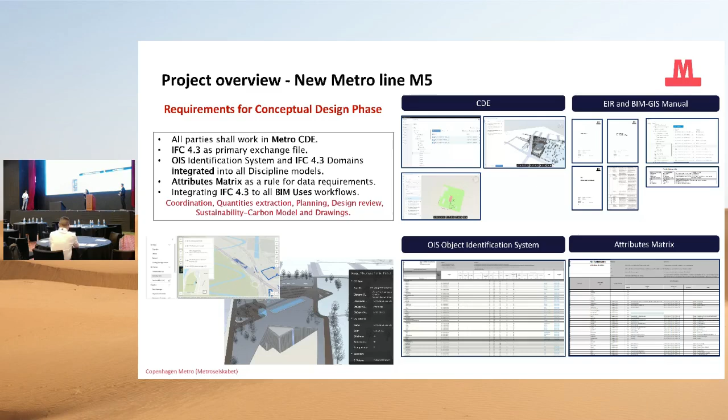For conceptual design, we have received 116 IFC files, which combined form 30 federated models with around 57,000 objects. The review process consisted of 2 rounds where we checked the OIS codes, the IFC types, and the parameters requested for that phase. We have provided 30 clash detection reports and 30 data check reports. An average of 94% of the data has passed our checks.

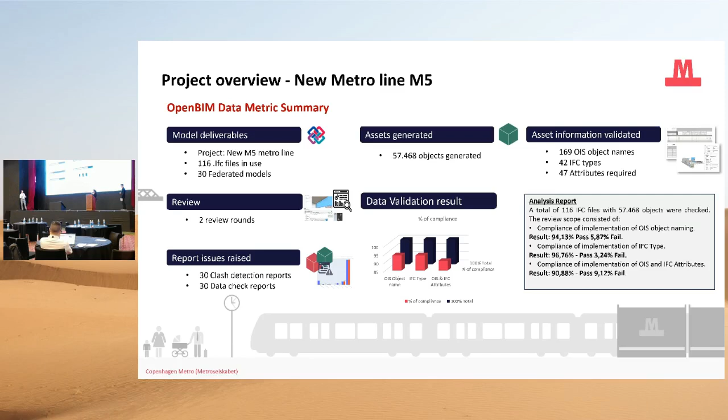To have a good schema, we had to standardize our data. That meant mapping our OIS classification system to IFC and also refining it so it works better with IFC, because we did not want OIS to simply replicate what we have in the schema. Instead, we wanted it to complement it and provide additional information. That meant dealing with a lot of data tables and a lot of mapping tables, and looking at the size of the data and the amount of users involved that it would take to maintain this data.

We decided to opt out from using Excel, and we moved this information to a database. So we've created a SQL schema, we've normalized it, and we pushed all of that data into that database. So that became our single source of truth. One very important thing that we were able to do with this is that we were able to impose constraints on this data and not allow people to type in things that they're not allowed to type in.

So for instance, if one table depends on another table, then the user needs to update both tables. Otherwise, the system isn't going to allow him to do it. Or if he needs to insert a 3-digit code, then he won't be able to insert anything but a 3-digit code. Next slide.

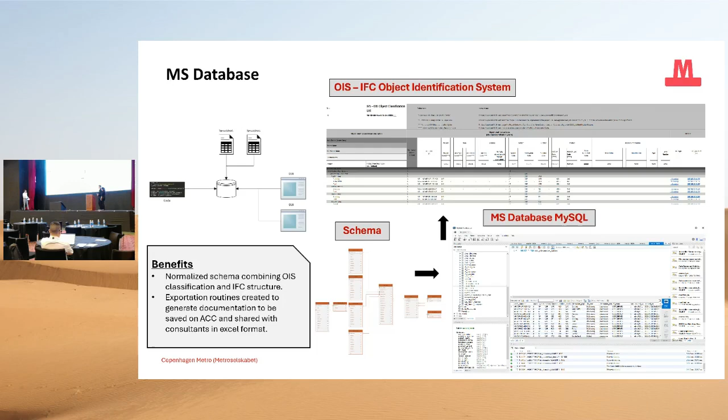Next slide. We did not want to use spreadsheets to exchange this information, of course. We wanted to use bSDD instead. The API provided a lot of possibilities, both for us and for our consultants to utilize this. We did play around with it. We created a test domain, I believe it's called in bSDD terminology. We loaded our database data to that domain.

But this was a live project, and stage 2.1, 50% was looming. And it was very important for us to make sure that the requirements that we've provided to our consultants are actually embedded in the models. And we wanted to have a workflow that is already tested, deployed, and that we could improve and then go into future stages with something really solid. And that's why we jumped in straight to IDS checks.

And we looked into standard IDS workflows and procedures and started to create a workflow that would help us implementing it in our CDE. IDS allowed us to check and validate our requirements using open source packages. As an example, we used the BlenderBIM plugin in Blender software and worked on custom scripts to fit our needs. And we created an automation routine to generate the IDS file from our database to make sure that the requirements are up to date, allowing us to skip creating the IDS file manually.

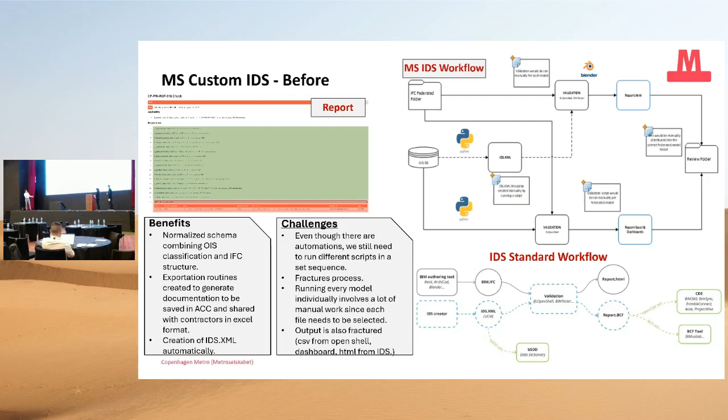Next slide. So we weren't exactly happy about that. So we decided to create our own solution and to automate the whole process. So what we've done here is that we made all of these automation routines or scripts execute in a predefined sequence where output from each script serves as input for the next one. And we have an almost 100% automated solution here. And it is actually pretty straightforward.

On the top side, what we did with Blender is that we altered the way that BlenderBIM works. We altered the code behind it and some of the packages that it uses. We've rebuilt that, and we made it iterate through the folder structure that we pointed to, detect all the models there, iterate through the models one by one, execute the checks automatically, and produce the output. At the same time, our OpenShell workflow would do the same in parallel, and then this data would be combined automatically into a single output. That is a CSV report that you see right there, where we do some color coding, and we would automatically generate dashboards to visualize compliance per station and per section as well.

We wanted the solution to be user-friendly, so we took a single Python executable that a user needs to run. He literally needs to double-click on it, and that will initiate this whole process. What the user needs to do, though, is update a settings file that contains directories to indicate where the models are, where the output should go, and some of the installations as well. And the last thing to note, I suppose, is that after these reports are generated, this routine automatically places them in the correct folder, in Shared, in ACC, through Desktop Connector.

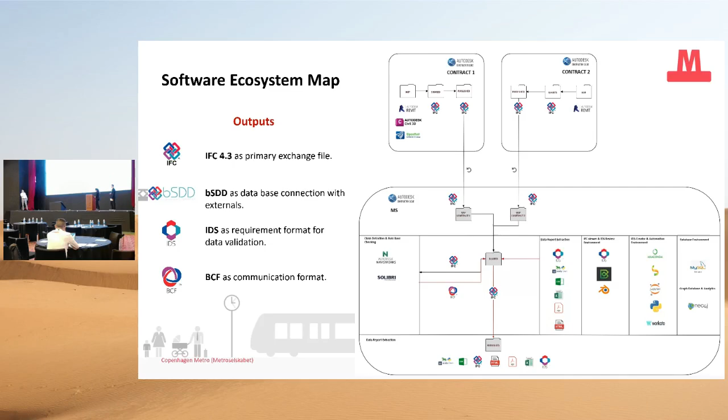And this is just an overview of our ecosystem that is very heavily based on ACC. These are some of the things that we specifically used for the openBIM project. So we've got MySQL, we've got a bit of Workato there, we've got IDS as well, and all that output goes into the Shared folder and subsequently gets moved to Published when it gets picked up by our consultants.